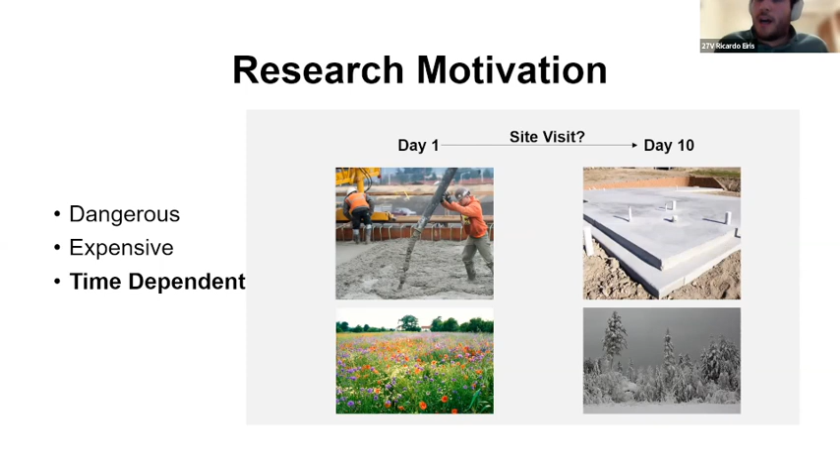They have other classes to attend to, and personal responsibilities as well. There's also a time dependency that makes things difficult. On day one, when it's summer, they might be doing a concrete pour, but on day 10, that concrete pour is gone and you can no longer see it. As you transition, if you have 4 seasons where you're at, in winter sometimes there's no construction. So it's very difficult to show them a construction site and demonstrate the concepts you're talking about in class.

Additionally, the way the learning happens is quite challenging. How are you setting learning objectives for those site visits? Are you making sure your students are engaged during those field trips? Do you provide them situated opportunities to practice while they're on those job sites?

Most of the time, what happens is that we take the students, they take a look around, they ask a few questions from the tour guide, typically somebody from a company that is very willing to help us, and it ends. There are no opportunities for us to practice while they are in there.

In addition to that, I think everybody is aware that COVID happened, which is why we are right now online. A lot of those field trips and site visits were canceled and are no longer offered, or they're very limited. Thankfully that's changing slowly, but that's still the case in a lot of places.

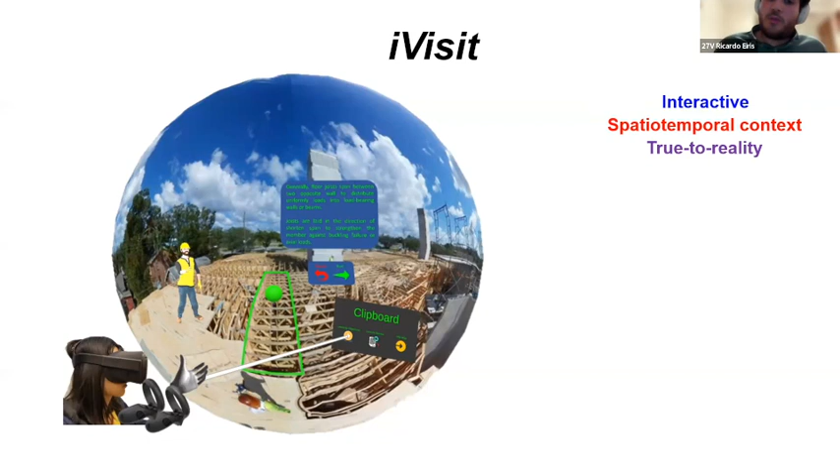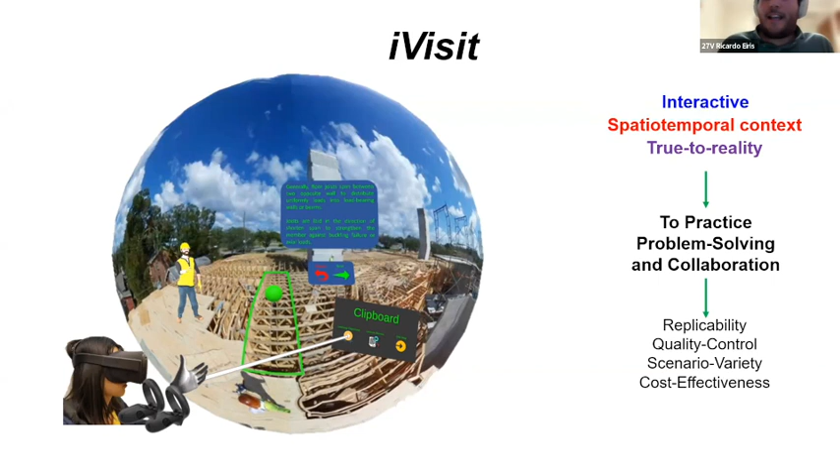The objective of this project was to create iVisit, an interactive setting where we could provide spatial temporal context to students in the classroom that's absolutely true to reality, using 360 panoramas and interactions so they can practice problem solving and collaboration in controlled, replicable, easy, cost-effective environments using virtual reality within the classroom.

In order to achieve that, we created a case study. We took a specific class that's typically taught in the classroom with associated field trips. In this case it was a class at the University of Florida covering construction techniques, typically wood construction, cast-in-place concrete, steel erection, and masonry construction. Those are the 4 main materials covered.

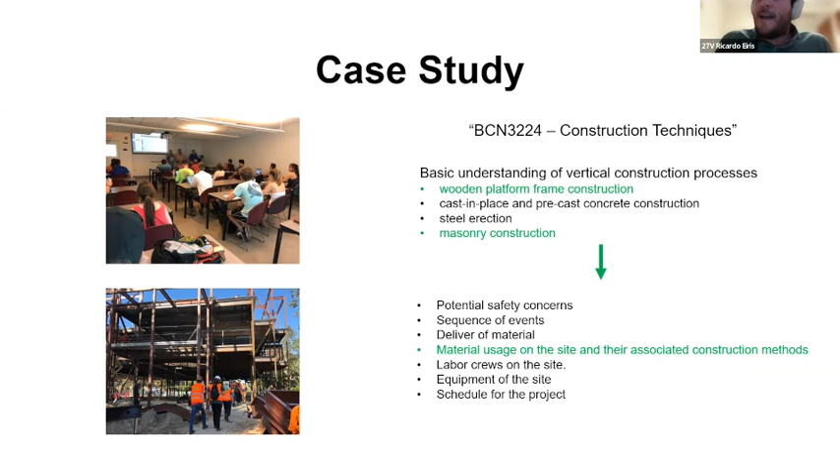Two of those were selected for this case study: wood construction and masonry construction, which are very common in the United States. Within the different topic areas they cover, we specifically selected materials usage because that is very visually observable at the construction site.

Based on that, we created specific learning objectives based on the Bloom taxonomy. At the remember level, we looked at materials and how those material properties for both masonry and wood were reflected on the construction site.

We developed specific learning objectives at the understand level, specifically into the assembly, how those constructive techniques allow you to assemble those materials into a building. Then we provided them with an apply opportunity, a practice opportunity within our digital setting for students to utilize that understanding and remembering and put it into practice.

We conducted interviews, looked at the materials in class and the book, and created two learning modules in our virtual reality setting where students would be able to utilize those virtual reality settings and then do the assessment also in virtual reality.

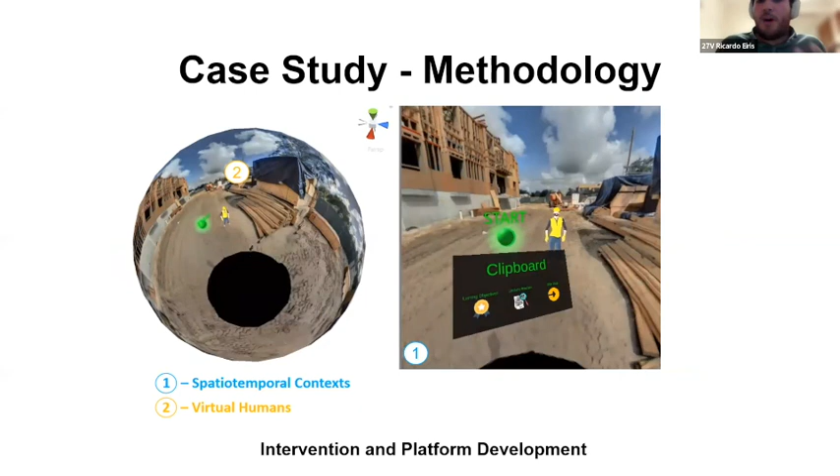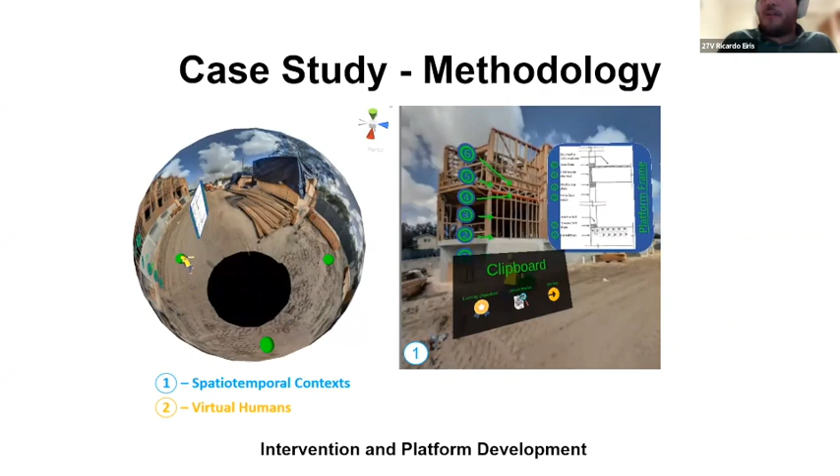The module looks something like this, where students go through waypoints, and at each point they would have a virtual human that would accompany them similarly to a tour guide. They would have augmented information on top of those 360 images, so they can additionally learn the different aspects of what they're seeing, accompanied by the description of that virtual human explaining the contents.

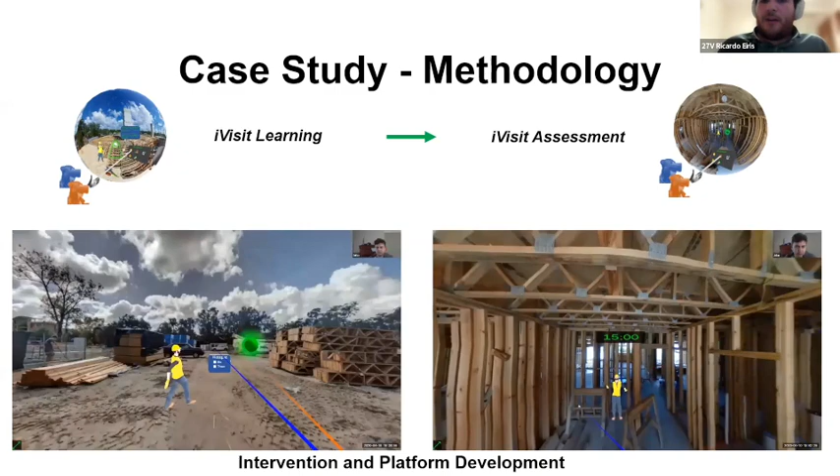In order for us to distribute this as a collaborative experience, we had the students do it in pairs. You can see on the top right corner that we had a student camera so they could share their screen as they went through the virtual field trip.

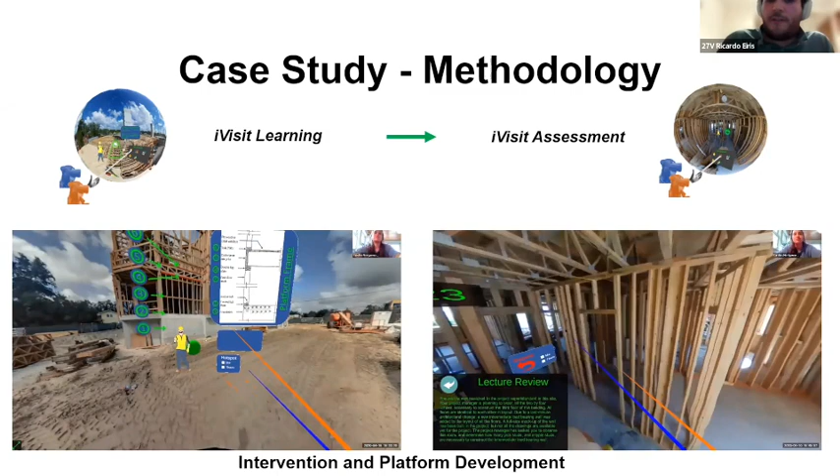On the left is the actual virtual field trip as it occurred. On the right was a problem solving activity where they would have to communicate with each other to describe what they're seeing in the environment based on what the virtual human described, and they would have to solve a problem in the construction site.

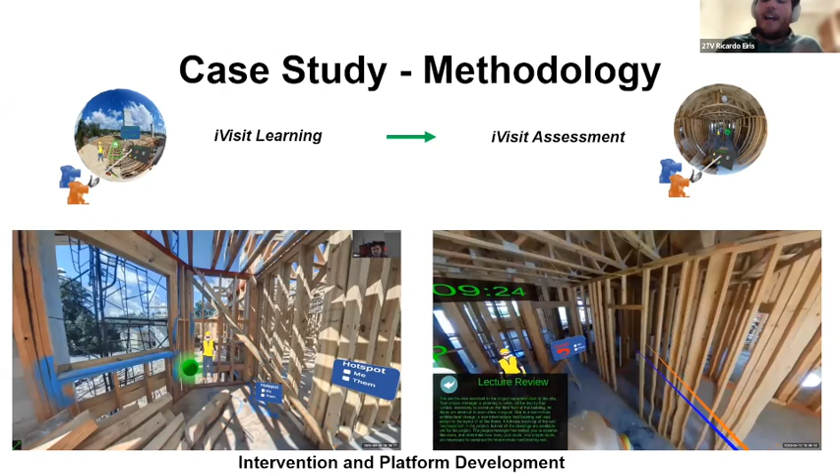To evaluate this experiment and see how much the students learned and what factors affect that learning, the first thing we did was a knowledge retention quiz, a typical quiz asking them how they captured information and whether they observed it at the construction site, to see how much they learned. We gave a paper quiz after they completed the virtual experience.

We also gave a spatial visualization test, using mental rotation to understand if the way they were able to perceive 3 dimensions within those pictures had any effect on knowledge retention and how they learned. We also asked them about their teamwork experience and whether they were comfortable working in teams within that virtual environment.

We also asked them about their attitudes with respect to the system. We looked descriptively at the results of these metrics, and we also looked at the correlation between the different variables. This was a pilot study, a case study with 26 participants.

That means we had 13 dyads of pair students. Their average age was 21 years old. Most of them were male, as is typical in construction programs. Most had no experience or less than 6 months of experience, meaning they were novices doing this type of activity in a situated context on the construction site.

They had low to medium familiarity with virtual reality, and the same with 360 panoramas. So they had experienced it before, but weren't really familiar and didn't use it daily. However, they rated high to medium familiarity with construction materials, particularly masonry and wood, and construction techniques as well. So they were pretty confident that what they learned in class helped them understand the construction site.